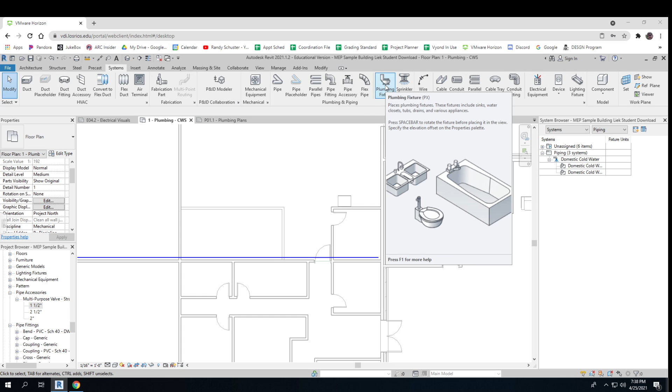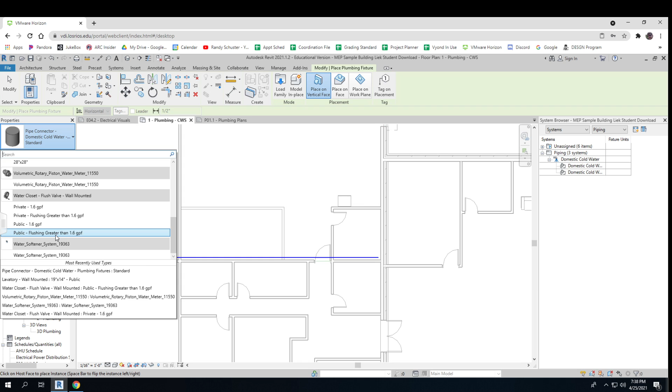Of course, the bathrooms are the first place we're going to look. So I'll put in a plumbing fixture. A lot of things come up that are already in here, but if they aren't, you can go look. The most important thing, of course, is our water closet, another fancy word for a toilet. We're going to use these public flush valve ones, which are greater than 1.6.

So we're going to go with the 1.6 - we want to save a little water. I'm going to put those over here in about the right place. I don't have to be perfect, but it needs to be in sort of the right place, so I'll put it in that corner.

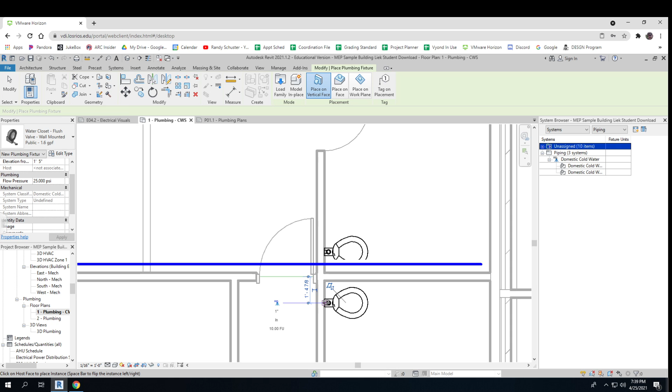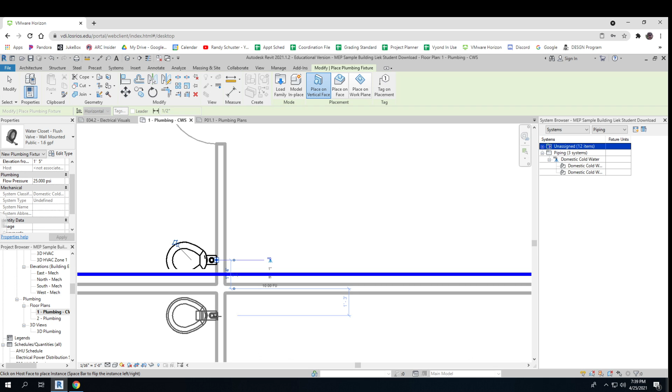I do need the ones from the other bathroom too, so I'm going to do the same type of thing. You'll see that I'm placing them in such a way that there's a lot of room for an ADA compliant bathroom in here.

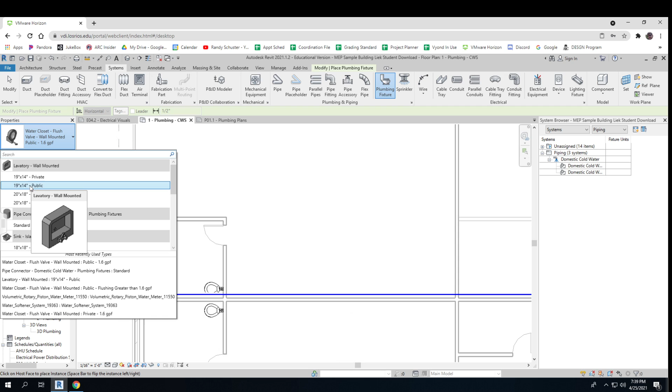My next one, plumbing fixture, will be the lavatories - where am I going to wash hands? Here we are. They don't need to be big, 19 by 14 will be fine. I'm going to put those over this way, so that gives me a lot of room over here to move around.

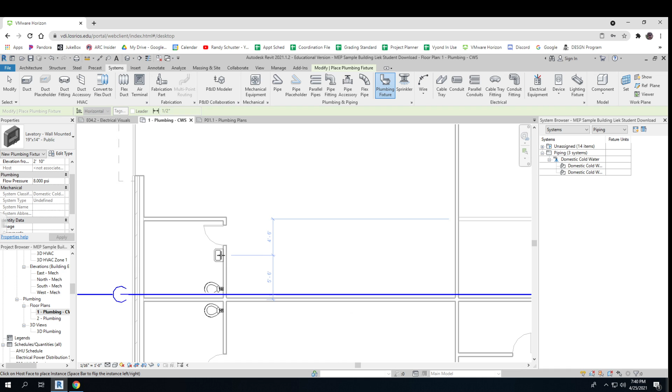I can put a divider in if I feel like it, but I probably won't since there's only one person at a time in here. So I'll put that one in there. And I think I'm going to move these just a little bit - they don't need to be that crammed against the wall.

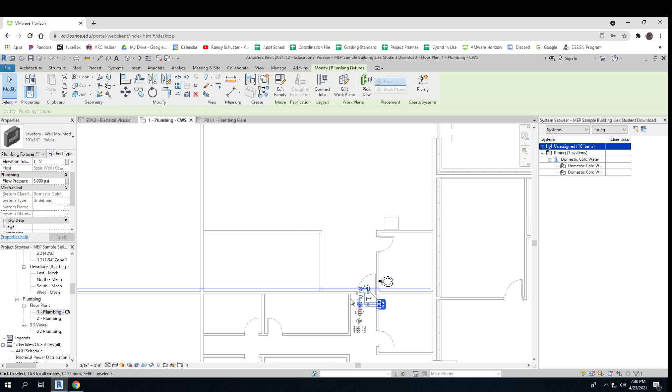There's probably a very good detail somewhere that tells me exactly how far away from the wall to put that for ADA. Now let me go ahead and put in my other lavatories - plumbing fixture, lavatory - and I'm going to put those in somewhere over by the door, so there's a lot of room and it's easy for people to work with and move around. These don't have to be exact, they're just giving a good idea.

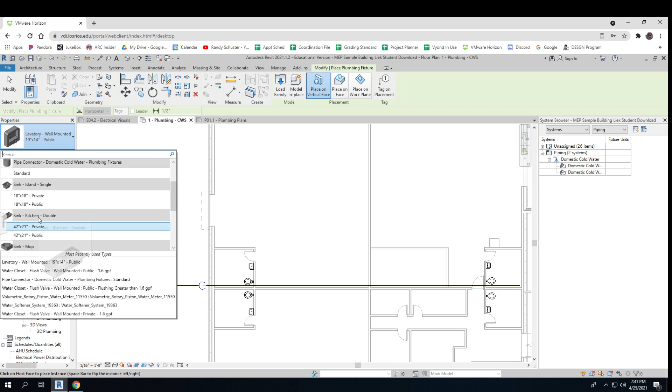So now I've got my lavatories set. I think in here, this is a break room, so it doesn't have to be perfect, but there might be something that works - might be a kitchen sink double. It'd probably be good to put a lavatory or something in there just to check on making that much water. I'll put a little bit larger one in, and I'm just going to put it against this right here.

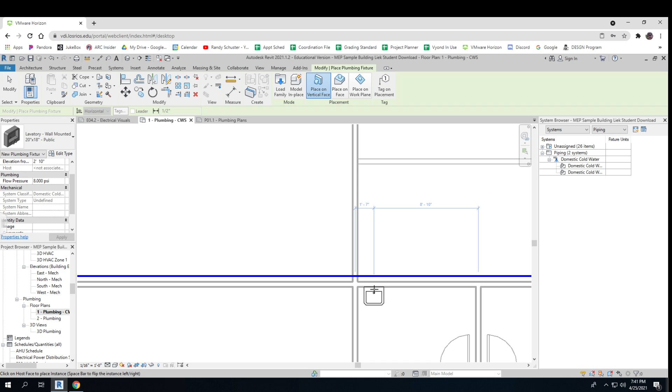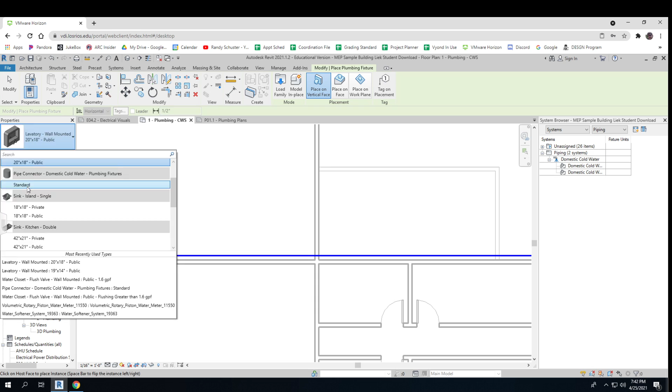That's really just going to be a point of use for water. Actually, since I don't know exactly what's going to be there, I'm going to do something else - I'm going to look for a plumbing fixture called a pipe connector, domestic cold water. You can find that under plumbing. I'm going to put it in, just one in here. It's a little tiny thing, but you'll see why in a few minutes. So I'm going to put that in there.

Now I need something to fill this up, so I'm going to put 5 of these in here because I'm going to want a lot of water, I think. Each one is 2 gallons per minute, so even though I might make that all one later on, I'm going to be able to fill this up at like 10 gallons a minute because there's a lot of water in here. So I'm going to put a bunch of them in there.

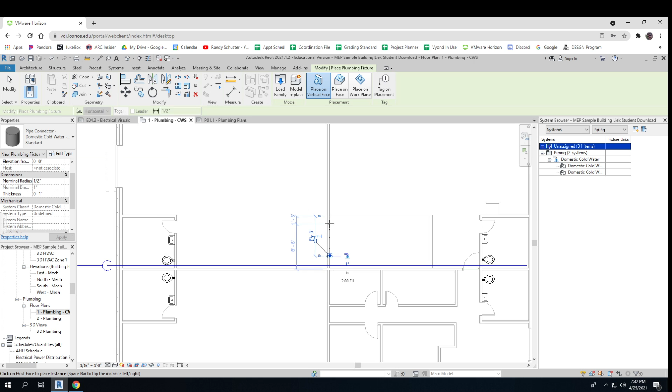And then I'm going to need at least another one over here for my chemistry area, and probably another one somewhere way down here, at least one over there. Doesn't have a host face - that'll be okay. Now those all got put in, I think.

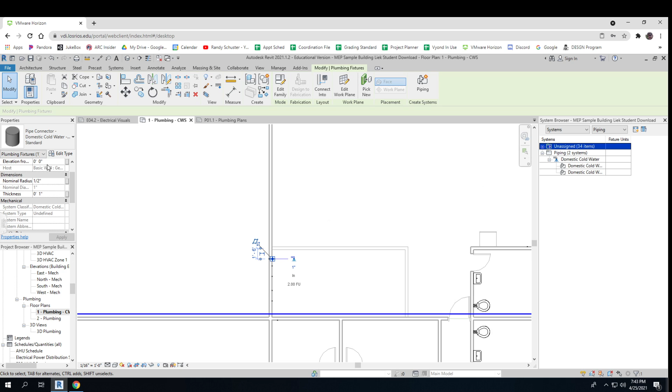Let's see what the elevation is for that - oh, I put it in at 0. I probably want it in like at 3 feet. See if I can get all of those at 3 feet. And this one at 3 feet. And this one at 3 feet.

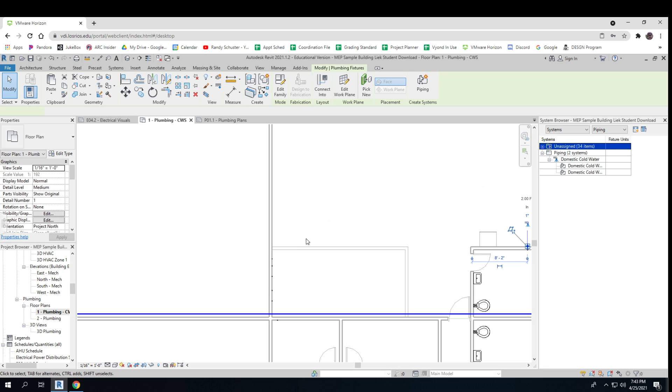If I had done it originally correctly, it would have been a little bit easier. And this one at 3 feet. So you can see, you're just going to make sure that you've got a place to put water everywhere that you can.

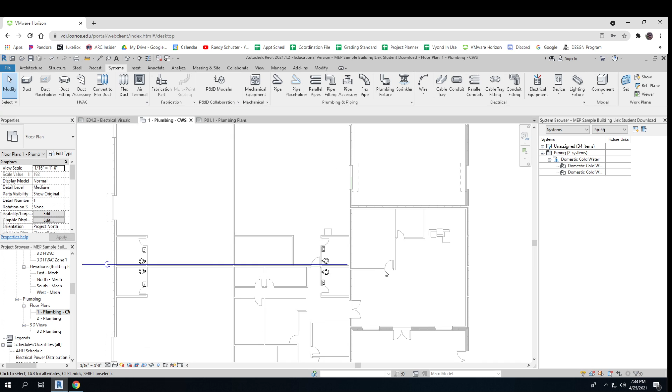Okay, so I've got my plumbing fixtures in now. Those consist of little hose bibs, water connectors that I can turn on and off. They consist of toilets and sinks. There might be other things in here that I'll want to put in later, but that will do for now. It could be that I need a little connector over here for some coffee or this or that or the other thing - I'll worry about that at another time. This will get me the minimum that I need for right now, to get you the idea of how to put in plumbing.